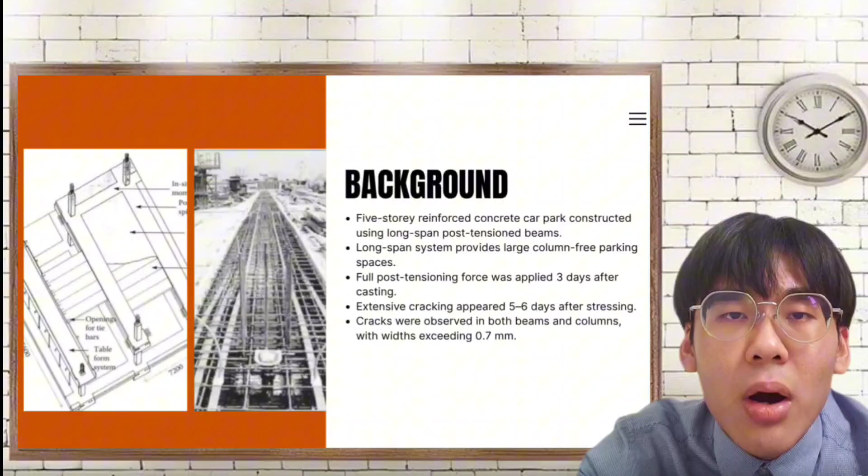These cracks were found not only in the beams, but also in the supporting columns, with crack width exceeding 0.7 mm, which is well above the acceptable serviceability limit. Based on this case, our study has 4 main objectives.

First, we aim to investigate the root cause of the structural cracking by examining both the construction process and the structural behavior. Second, we assess the material properties and structural performance through engineering evaluation and suitable testing methods. Third, we compare the structural response under 2 loading conditions: gravity loading only and gravity loading combined with post-tensioning. This comparison helps us understand how prestressing influences the internal forces within the structure.

Finally, based on our findings, we propose appropriate strengthening and remedial measures to restore the structural integrity of the car park and recommend preventive measures to avoid similar failure in future projects. Next, I will pass to the next person to continue the presentation.

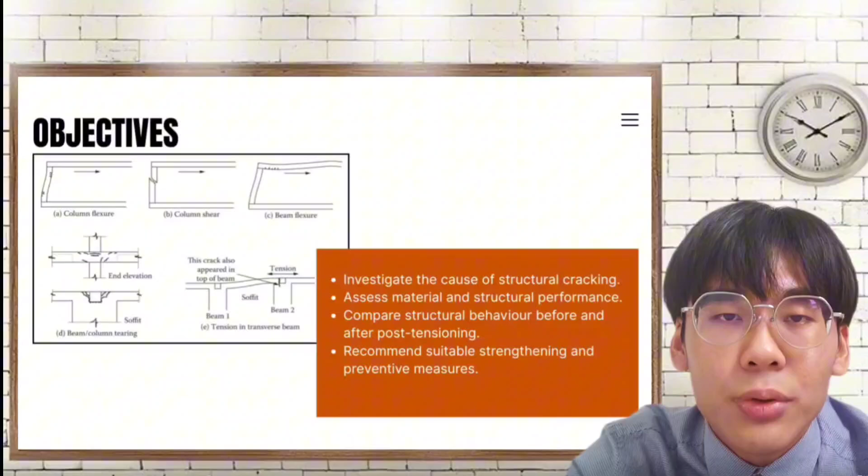Hello everyone, my name is Tian Hao. Today I'm going to continue the assessment phase of our case study on the structural failure of the 5-story car park. To understand why this structure experienced such massive cracking, we have conducted a comprehensive material and structural assessment.

First, let's look at the concrete properties. We have carried out 3 vital tests. The first one is the compressive strength test, which helped to verify if the concrete had actually achieved the required transfer strength before the post-tensioning force was applied. The next one is the modulus of elasticity test, which helps us to evaluate the concrete stiffness and understand its direct effect on the beam shortening.

Finally, a creep and shrinkage assessment was critical to determine how time-dependent deformation influenced the restraint-induced stress within the frame. Second, we closely evaluated the reinforcement and post-tensioning system. This involved an anchorage inspection to check for any critical cracking, concrete spalling, or localized failure around the anchor.

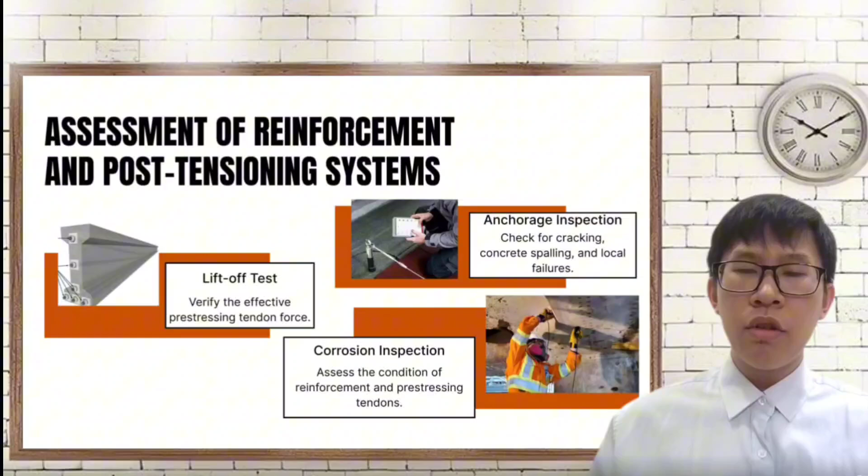We also conducted a lift-off test to precisely verify the remaining effective prestressing tendon force. Furthermore, a corrosion inspection was performed to ensure the overall integrity and condition of both the rebar and tendon. Lastly, we have implemented non-destructive testing or NDT to safely analyze the inner condition of the structural elements.

We use the rebound hammer test to quickly assess the concrete surface hardness across different locations. These were combined with ultrasonic pulse velocity (UPV) testing, which allowed us to map out and detect any deep internal defects such as voids or hidden cracks inside the concrete. That's all from my part. Now my team will explain the remaining NDT methods and the structural modeling results.

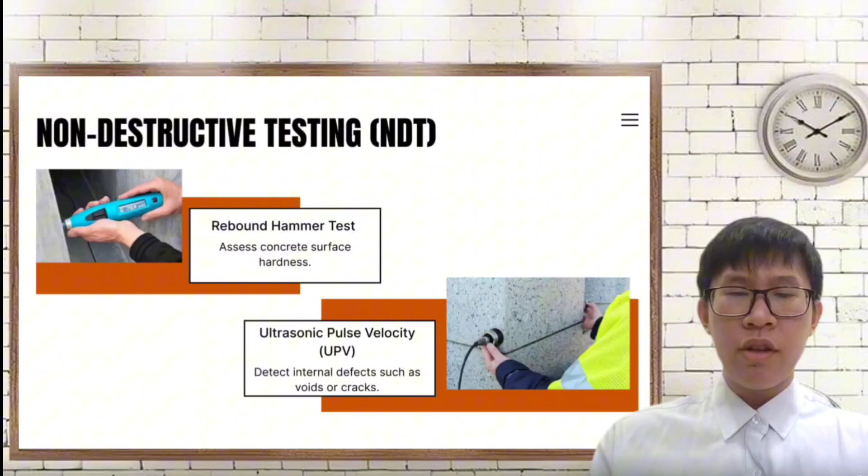Thank you. Other than rebound hammer and ultrasonic pulse velocity tests, additional non-destructive tests such as crack survey and monitoring, as well as ground penetrating radar (GPR), can also be carried out. First, crack survey and monitoring will be carried out to identify the location of cracks, measure their width, and observe whether the cracks continue to propagate over time. This helps in understanding the severity and pattern of structural distress.

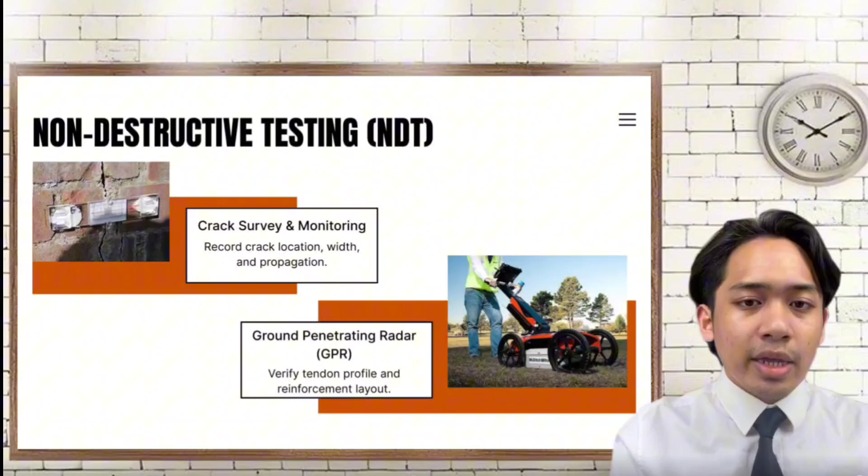In addition, ground penetrating radar or GPR was used to scan inside the concrete to verify the tendon profile and reinforcement layout. This is important to check whether the tendons and steel bars were placed according to the design and to detect any possible construction issue that may have contributed to the cracking.

Next, this slide describes the structure and the representative frame selected for structural analysis. The case study is a 5-story reinforced concrete car park with an RC frame system, a beam span of 15.6 meters, column height of 2.7 meters, beam size of 2000 times 575 millimeters, column size of 600 times 600 millimeters, and 150 millimeter hollow core slabs.

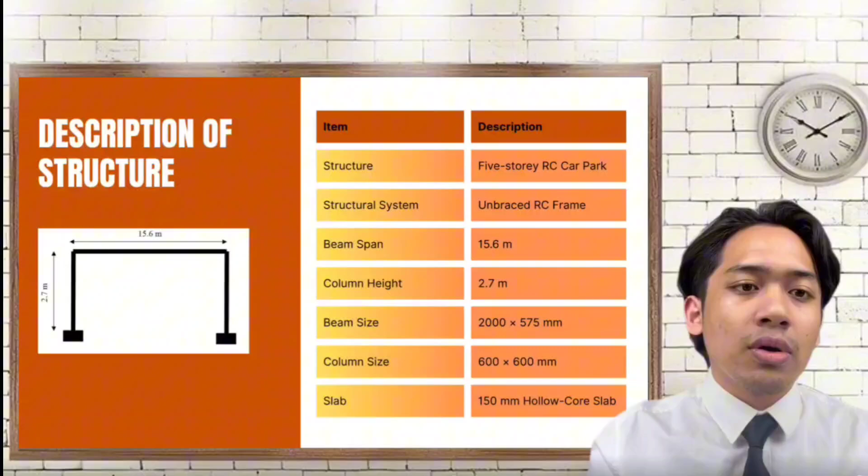To study the structural behavior, two loading cases were analyzed. Case 1 considers gravity loads only, including the dead load, superimposed dead load, and live loads, in order to establish the baseline structural response. Case 2 includes both gravity load and post-tensioning effects, where pre-stressing force, equivalent upward tendon load, and axial pre-stressing force were applied to evaluate the influence of post-tensioning on the frame behavior.

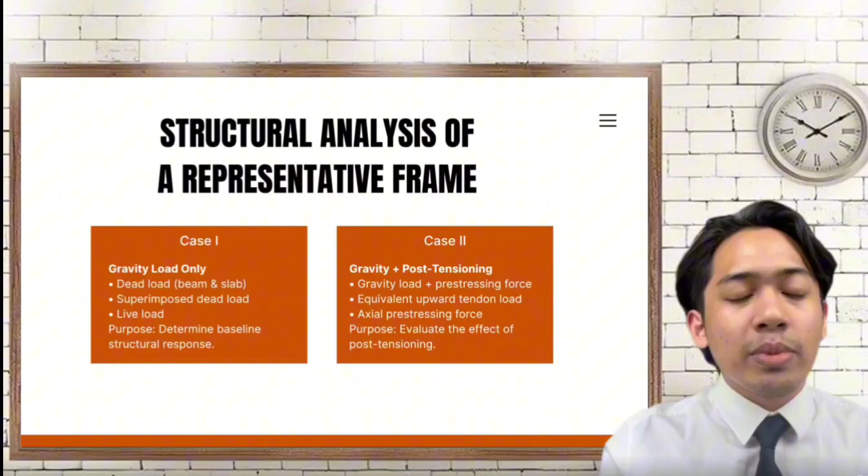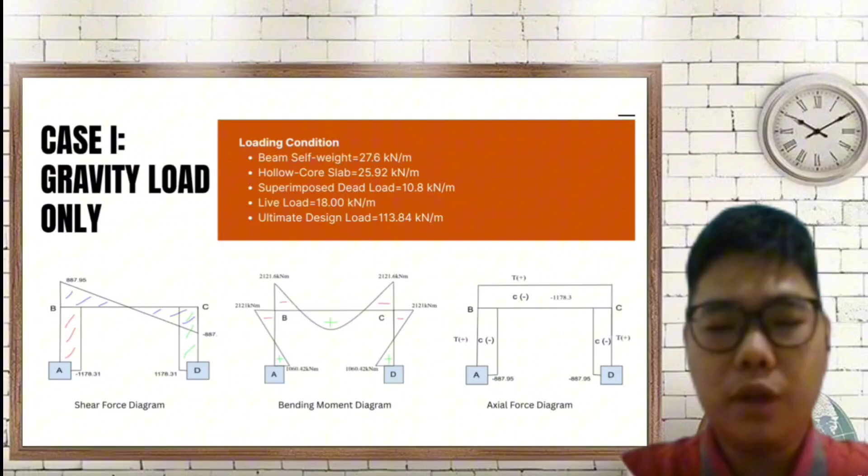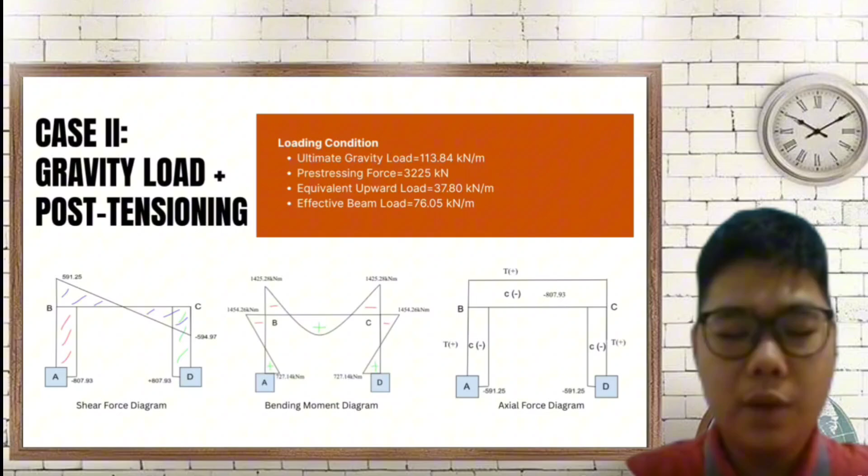So last for me is the discussion and the comparison. The net design load on the beam is cut down by using post-tensioning. The maximum shear force and moment are reduced by 32% and 31%, greatly optimizing our flexural and shear performance. From the engineering perspective, introducing that 3225 kN axial compressive force does cause immediate elastic beam shortening, which will further evolve over time due to concrete creep and shrinkage. Because our rigid beam-column connections restrain the shortening, careful reinforcement detailing is essential. Ultimately, post-tensioning allows us to safely and efficiently maintain a slim long beam profile under an extreme load.

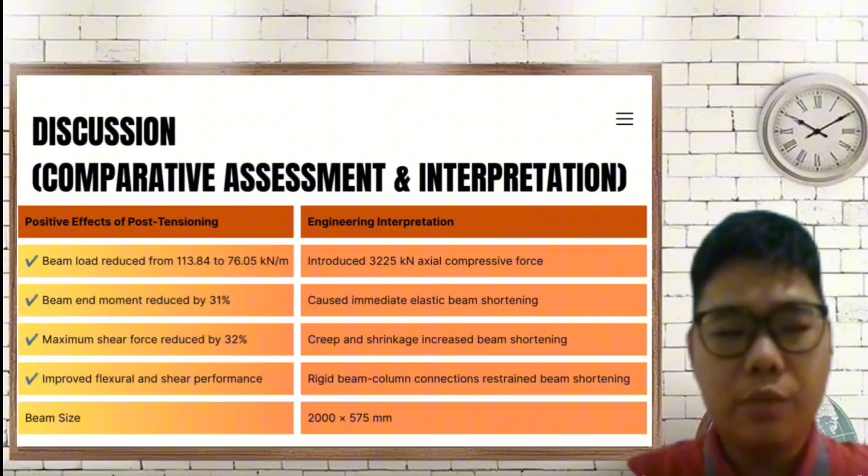I'm Tawiki. Now I will explain the strengthening and remedial measures of our project. First, for immediate repair, stable cracks can be repaired using epoxy injection. This method restores the continuity of the concrete, prevents moisture from entering the crack, and helps improve the structural stiffness. Next, a post-tensioning system inspection should be carried out. Lift-off testing is used to verify that the tendons still have the required stressing force. At the same time, the anchorage zone should be inspected for any sign of cracking, concrete spalling, or tendon damage.

For structural strengthening, one effective solution is the application of carbon fiber reinforced polymer, or what we call CFRP. This can increase the beam flexural capacity and improve crack control while adding very little extra weight to the structure. Another strengthening option is external post-tensioning. This method can help to reduce the tensile stress in the beam and improve both its long-term serviceability and overall structural performance.

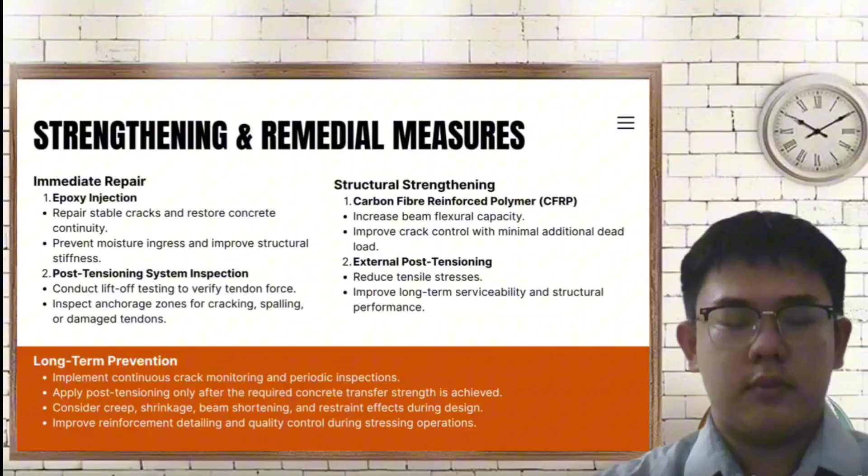Finally, for long-term prevention, continuous crack monitoring and regular inspection should be implemented. Post-tensioning should only be carried out after the concrete has reached the required transfer strength. During design, engineers should also consider creep, shrinkage, beam shortening, and restraint effects. In addition, proper reinforcement detailing and strict quality control during stressing operations are essential to prevent similar problems in the future.

In conclusion, this investigation confirmed that gravity loading alone was not responsible for the observed cracking. Although post-tensioning successfully reduced bending moment and shear force, it also introduced significant axial compression and beam shortening. When stressing was carried out at an early age, the combined effect of creep, shrinkage, and restraint from the surrounding frame generated secondary tensile stress. This tensile stress exceeded the tensile strength of the young concrete, leading to the development of cracks. Therefore, future projects should ensure that concrete has achieved sufficient strength before pre-stressing begins. Designers should also consider time-dependent effects such as creep and shrinkage during both the design and construction stages to minimize the risk of similar cracking.